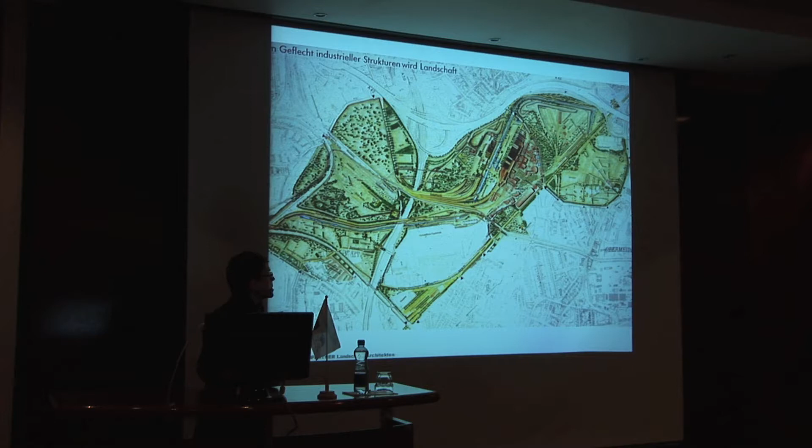I can only invite you to go there. Unfortunately it's a lot of money, and since all the cities are bankrupt in the Ruhr area today, they have hardly any money to do it, but two evenings a week the light system is still running. So what still looks here like an industrial compound effect has become a park. With all these systems, it transforms history into future, it makes industry part of our life, even if this industry is abandoned and not working anymore. There are many more things to talk about, but I thought this gives you a glimpse of how we can integrate these elements and make urban life more interesting.

How to deal with waste? Of course we cannot really live with waste, that's a sanitarian problem. But what we know is that these waste compounds, and this is one of the biggest ones in, well, I would say almost Europe, is being eaten up by the city.

The city is growing around it, and they were asking what to do with it, inviting artists at the very beginning, the real landfill, and besides that also our office to give advice on what to do with it. Then they started an international competition, which we fortunately won, a big honor for a German working in Israel, I would say.

We also won a second competition just afterwards to deal with the enormous landscape around the waste compound, because they have to make a floodplain in order to retain stormwater. Regularly, Tel Aviv is flooded in some areas once or twice a year, because they have hard rainfalls and more and more sealed surface, and also because we're very close to the West Bank and they don't have any means to stop the water from running down and taking all the waste onto the streets with it.

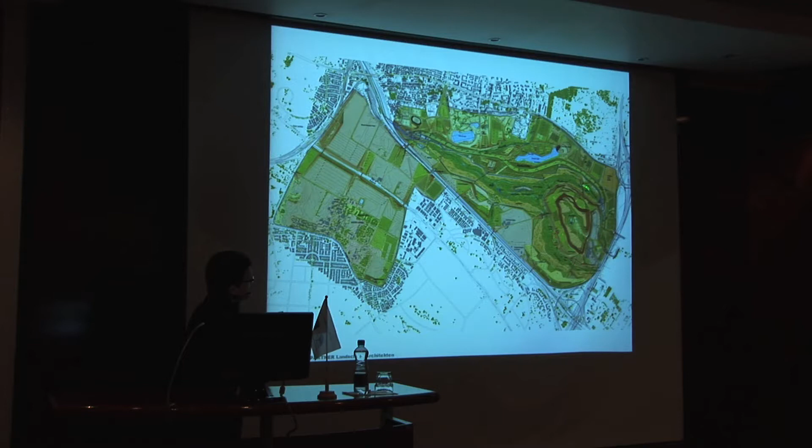Basically, this area is flooded and the city is flooded. So we're going to move here 7 million cubic meters of earth and create a big park around it. But I just wanted to talk about this one, the waste compound, what to do with that. This is a photo from an airplane, because Ben Gurion Airport is just beside. What we did basically is to reposition that thing, and in contrast to the other competitors, we said we save the form and do something with it.

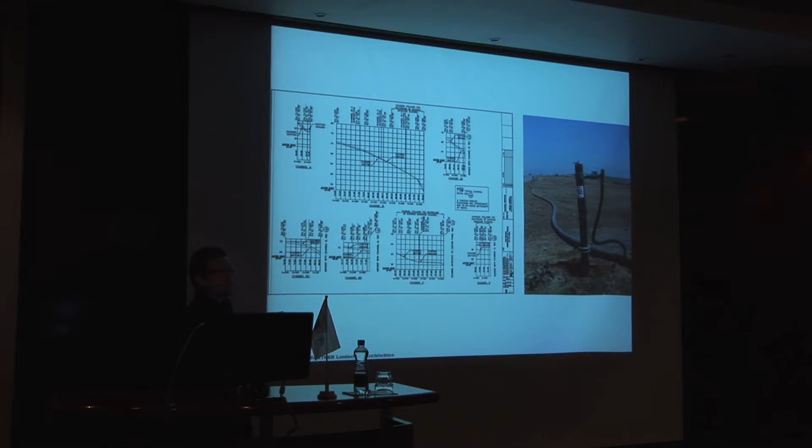And the second is, a waste compound is like a pudding. It tends to go down like this, because it's more or less liquid. So our proposal, and I think that's why we won, was to just put a berm at the bottom in order to keep it from doing that, and to make this kind of security system the future landscape.

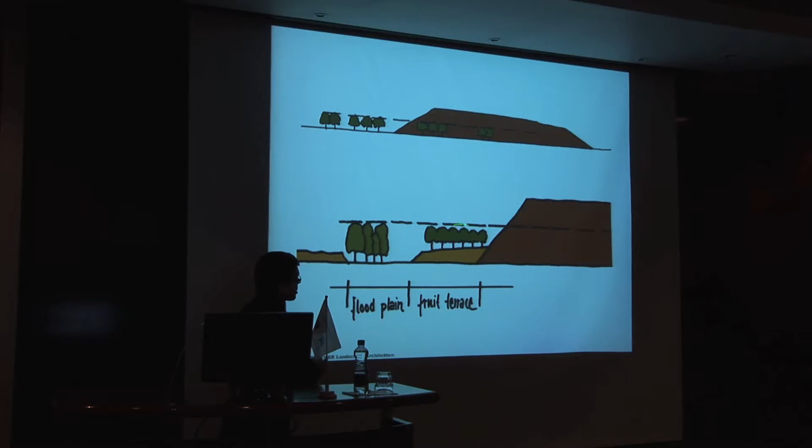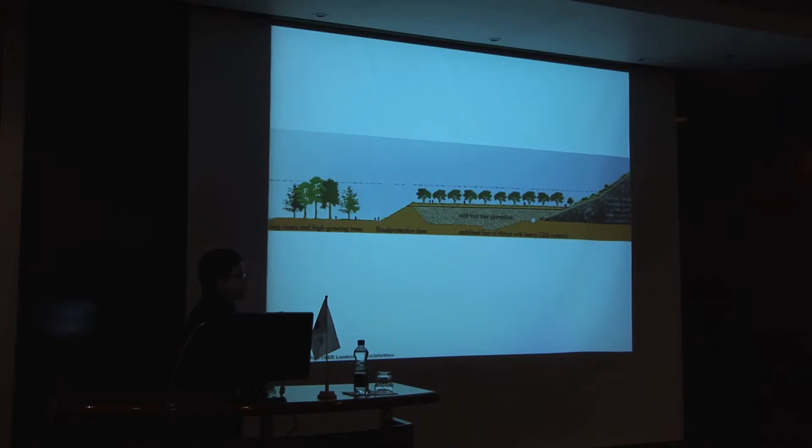It was, of course, in the competition, a simple drawing. It has become a bit more complex, a bit higher, a bit stronger, because the landfill turned out to be very big. And creating this berm around it, which was then occupied by agricultural patterns - that's another theme, to integrate agriculture, here mostly with fruit trees and olive trees around that.

And to basically push the river, which was at the bottom of the hill, outside and make it a kind of free-flowing riverbed, naturally driven. You would walk over industrial bridges inspired by the industrial past, over a kind of green landscape where there's a lot of water, and you walk into a rather dry landscape, which is agricultural.

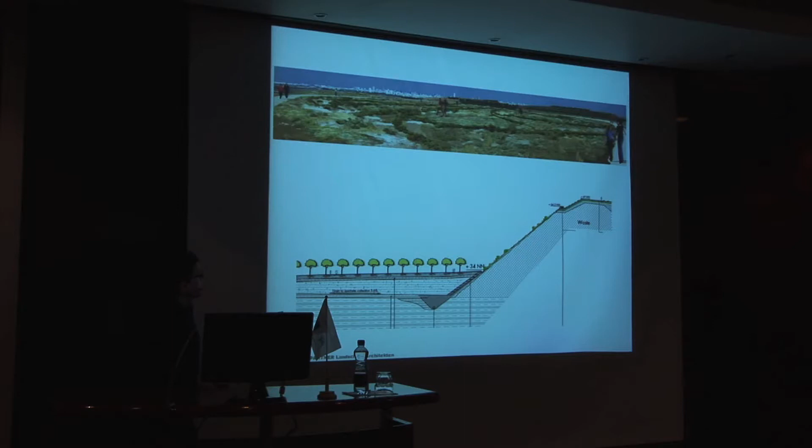And then, this is the latest plan we've been doing. Of course, it has been continued with colleagues in Israel - we're always working with locals when we realize projects far away. And we kept the outside of the hill as it is, in order to keep that fantastic picture, and light it at night, do something with it. And on top, we kept the big plateau in order to see the white city of Tel Aviv and the Mediterranean Sea, of course.

The sealing is necessary, but it helps to collect all the rainwater and keep it in little ditches within the sealing in order to have more water for summer. Unfortunately, this is not enough to have enough water for the park, but it helps a lot to make it more sustainable and well working.

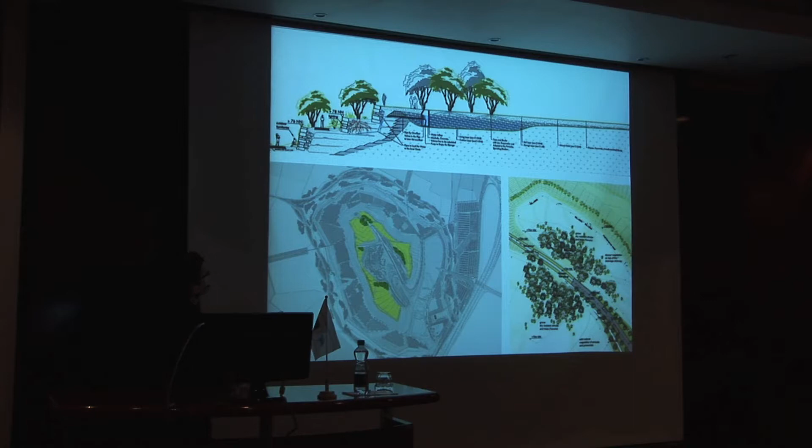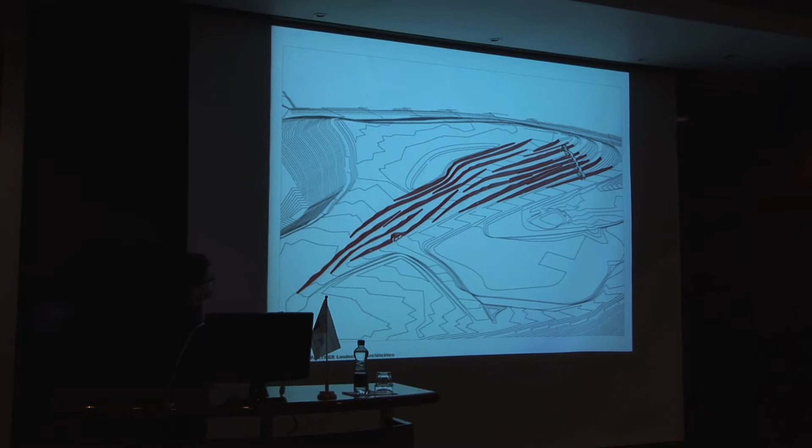The second system was an inside valley, which we kept, and we're working with movable systems. So there's no clear line, no straight line, no cool concrete wall. It's an old system which works perfectly in such a setting - the old drywall system, which you might know from Mediterranean countries a lot, which has to be piled up by hand and creates many little usable terraces.

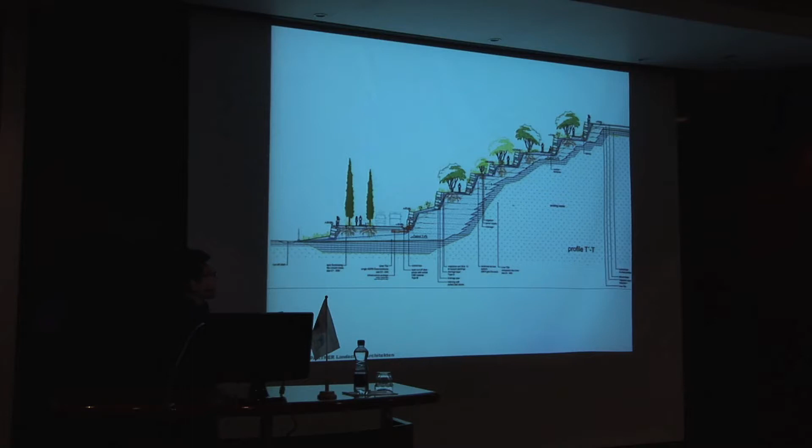So the technical system is usable - that's very important. And it creates a landscape which has thousands of paths and can move and works with recycling materials only. This is in our garden.

We are testing some of our systems in our garden. This is not always funny, it's a lot of work, and now it's a lot of maintenance, because the garden is occupied by experiment. That's where we are.

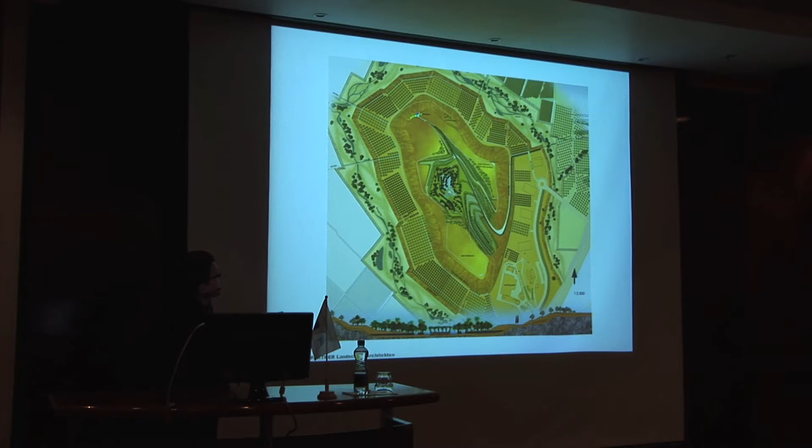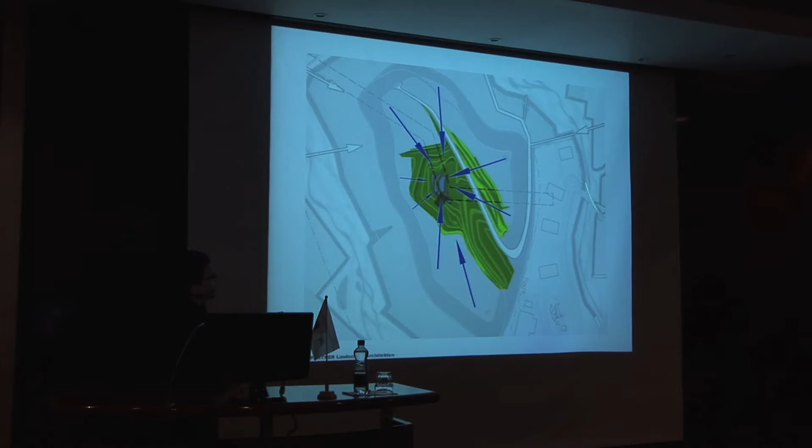So within this central area, we're doing the landscape where we put all the water we save. It's kind of a typical system in that region, adapted to the climate. So all the water from the top will be put in there, and hardly any water will come from outside into that kind of oasis.

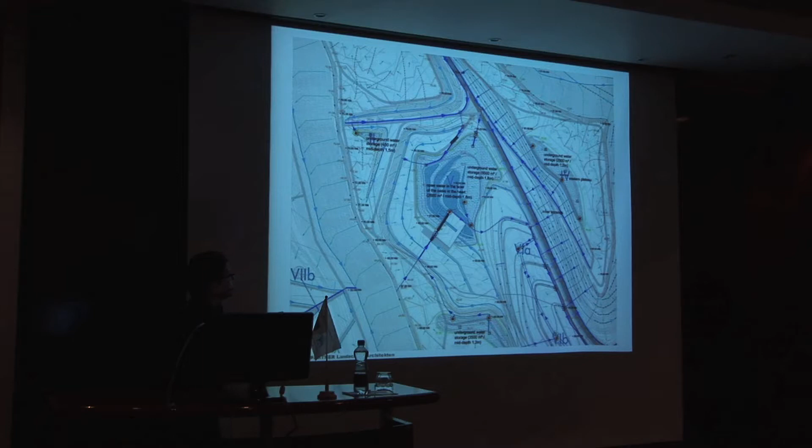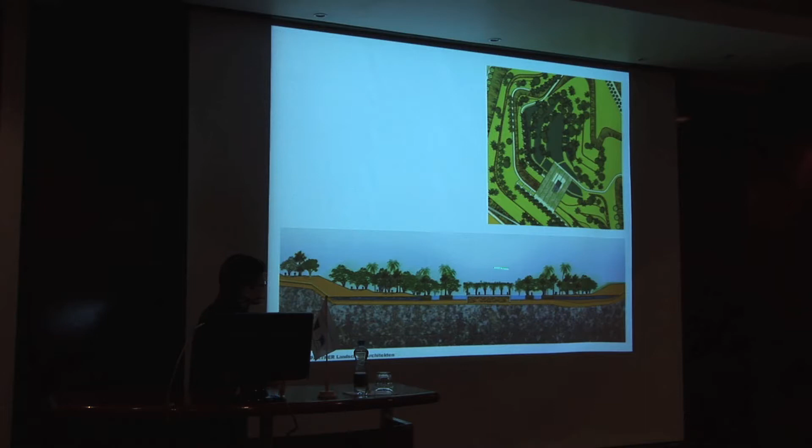The system is of course complex because we have to work with moving earth so that these drainage systems will also work in the future. And then finally, we have an underground storage system, like an oasis also. We're copying nature, so we have a Gabion system on that kind of level, where we bring all the rainwater, keep it cool, so we don't have to recycle it. And we only need some pumps to move the water within the central system and use it for watering.

Maybe one day, this is a very old picture, it might look like this. We don't know yet - I mean, this project is constantly adapted to political circumstances, let's take it that way.

Israel has the problem that when they have a crisis, whether unfortunately military or financial or whatever, it has a direct effect in that small country on every project. And so the project is difficult, and we're starting rather with the big things, with things which can be shown in the press.

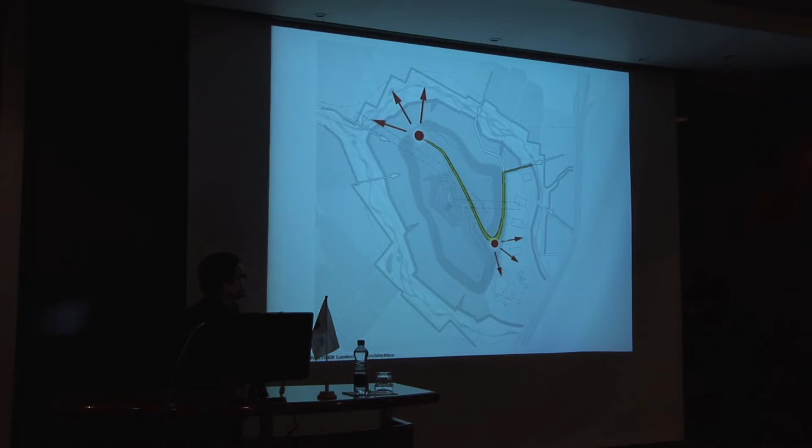And these two things - it's the path up, sponsored by especially American experts - consist of a viewing platform, which will be put on a kind of access road in here, where you can look at the recycling systems. And this is the night image.

So this will be the pathway. This is an animation, and you look down into a recycling park. We said, no, we're not taking the recycling park out of sight, we want people to see it. It's one of the most visited recycling parks, also shown as animation. This wall has just been constructed, people can already look down, but the path is not yet built.

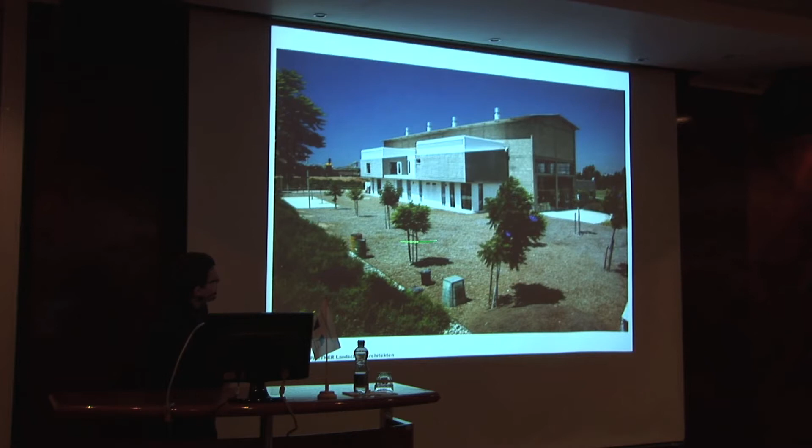And they look down onto systems like this. This is a recycling center in an old compound, where all the furniture and everything happening in there has been done with recycled materials, recycled wood, plastic, etc. Especially in Israel, recycling is extremely important because they don't have any resources other than their wonderful climate and wonderful earth to create agricultural products.

Recycling has become a big issue in that country, so school classes are coming here, companies are sending their staff to be trained and informed about recycling. The other point, sponsored by those people, was a lookout point. Every time you do a park, think of that, you need a good lookout point, because politicians want to have the inauguration of the first step in something like this.

But also, I love it. What is a park without these fantastic things? Think of the old parks like the Buttes-Chaumont in Paris, one of my favorites, where you have that little strange structure on top where you go in — you don't need it. You could go on top of a mountain and look down and say, oh, beautiful it is, but people love to have something there. I love it too.

So what we did is this, it has to be a moving structure. You cannot do something stable up there with a view over Tel Aviv. That was the animation — it's a bit bigger than that today.

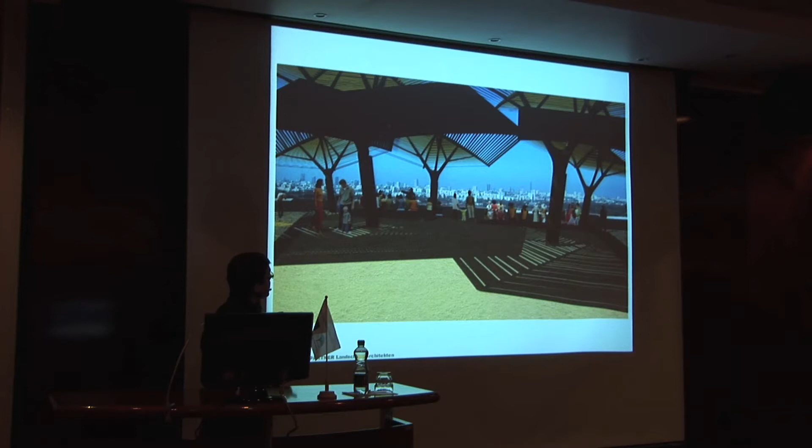From there you can see that construction has started. It's very slow. I think this project will last very long, much longer than Duisburg, much more than 10 years. This is just during construction. I'll show you that picture because it was the only one I found.

When we had the inauguration, there were so many people and we were not allowed to go here because the local engineers made a mistake in the calculations, and one of these was just falling down. They change everything in Israel — it's quite funny, to make it more efficient or cheaper. We had big problems, now they're reconstructing the whole foundation. It's not very funny. But it's a moving structure which moves with the mountain, and in this sense basically reflects the mountain's logic.

A third thing is traffic. As designers, architects, we're very much working on making efficient systems where we save space, use less square meters, make things efficient, bring things together. But the most terrifying system in our modern world is streets.

We're covering each month already 60 hectares only in Bavaria — I think it's even more than that. And you have here the effects of that, which is part of our modern life. We don't like it, we try to push that out, but it is part of our modern life, and of course these systems, which are very efficient, are not adaptable to urban areas.

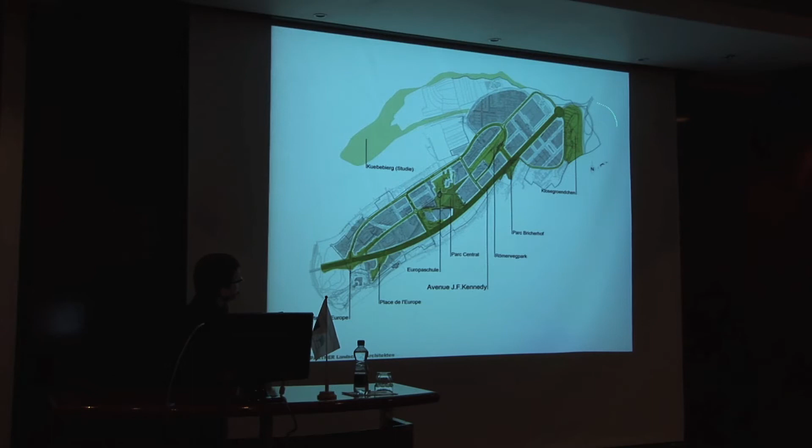That came along with a big master plan, where we had some park space, but I only want to talk about this. That's how it was looking: the motorway, very effective, only 2 junctions, which means an enormous production of traffic, because you have to make big detours to get to your house, from the back of course, not from the front.

And you're losing all that space. This is anti-urban waste. You need maintenance for it and you cannot use it. There are some ecological programs for that, but I think that's rather ridiculous in modern times. We have to do something with it.

And that was the result, 10 years later: the boulevard, which of course is huge, but it integrates not only the 2 lanes, it integrates spaces for a new tramway, a bus system, pedestrian areas, a contre-allée, which is the parking along that way, so you can park along that. Here you see that section. It's a huge boulevard, but it's also a huge area.

One of the first realizations, it's realized in steps, integrating also these very anti-urban structures, although nice architecture maybe, but very problematic to integrate. This is the final piece we're just working on, the connection to the bridge and to Luxembourg city center on the other side. These are all European institutions, and it will be more and more dense, so there will be constructions all along this side and this side.

And now I talk about how this looks. Well, there was a motorway once, you can now cross. Very simple. It's interesting because if you ask engineers who are calculating that, they say it's not possible. But the thing is, when you start calculating things, the only thing you get is more traffic. It's in the logic of the system.

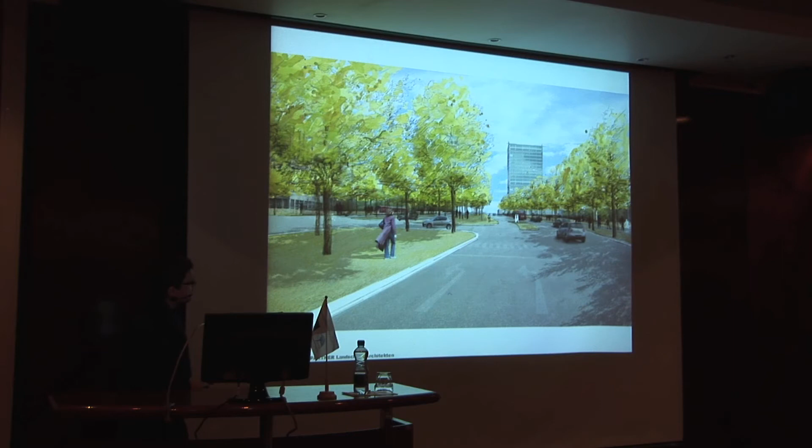And I just want to talk briefly about this system, which is the way how to integrate such a big infrastructure into green systems. When you look into something, usually they don't have any money for that, but already in classic landscape architecture we can learn so many things. Like when you see a landscape and Sckell or Lenné was putting a little temple, the whole landscape became a park. You know these famous guys, Capability Brown and many other designers, and what we did is something more or less similar, create a window.

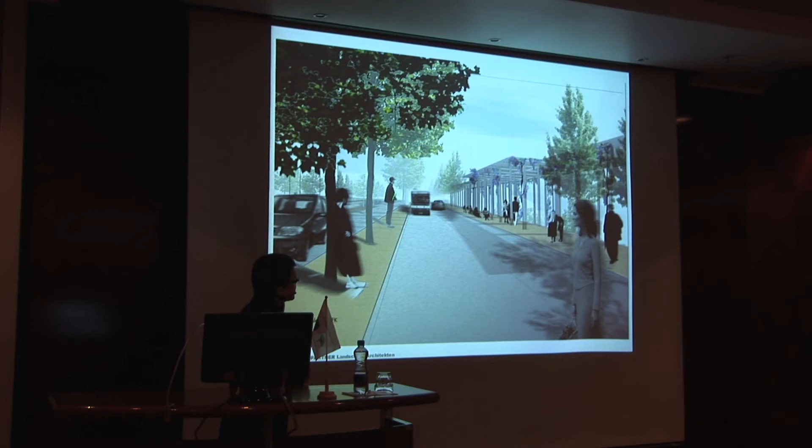Fortunately, they bought into it, and this is the motorway plan. We proposed two structures: one which looks into the landscape—a kind of slope down into that landscape, which is more or less artificial, but green—and one from the park system, which looks into the city.

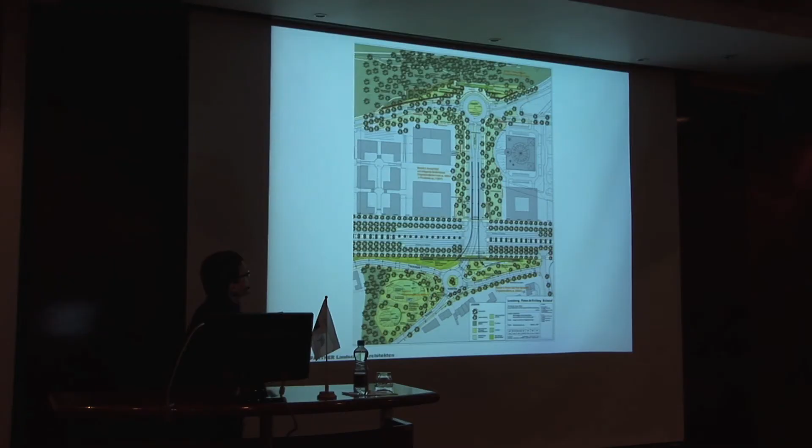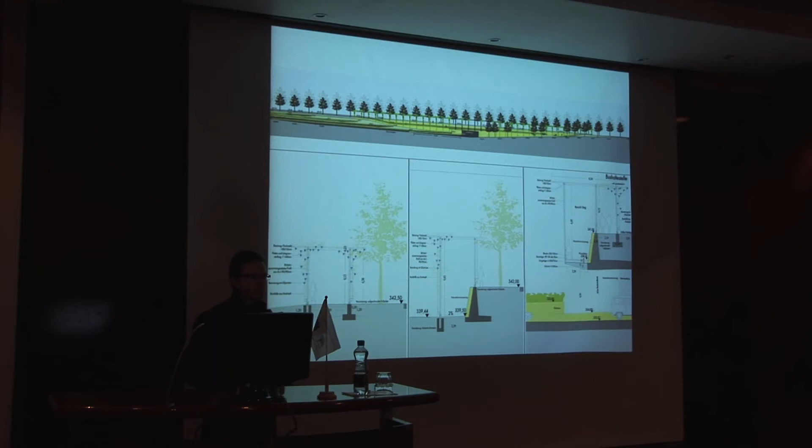The effect was that we proposed long structures with big walls, a big intervention which can cope with the power of traffic. Traffic is a very powerful system. If you discuss it that way, you can maybe cope with it. If you say it's noise, it's horrible, it's dust, it's emissions, you will never be able to work with it—you'll have to leave it to engineers and specialists. But if you take it from a landscape architectural point of view, you can have interventions like this.

This is construction, not an intervention. Behind it is a green system, and we're connecting the street directly to the green system. It's a very classic system—you connect directly and make it interesting to walk into that landscape. So when you drive here, you're not having a decorative green buffer zone, you're having the park right next to the street. That's an open system.

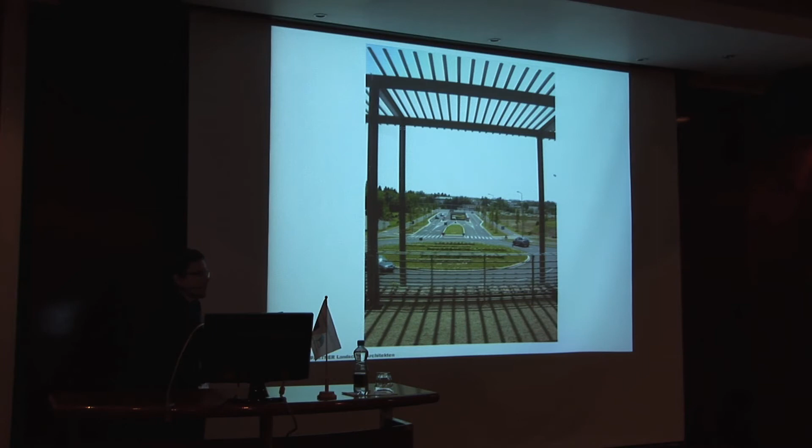All the other systems, I think, are not. You connect it to the beauty of landscape, which happens sometimes right beside streets, and you have the view back into that system. I wouldn't say this is beautiful, but it works. We have to find ways to integrate big streets into our cities. We have no other chance. If not, we neglect a very important part of what could be work for landscape architects in the future.

So this is the boulevard. You cross here, you walk down, and you also see the green systems, which you wouldn't see if you drive along. But because you have such a symbolic nature, you might see it, and then you walk down. This is just a year after construction—there's already many things happening, many more architecture to be created. I hope it will be a little bit different to this one here.

And also connecting underground systems—this is something we're doing also in recent times, trying to find static systems for crossing. That's nothing new. But what is important is that not the traffic system is dominating the area—it's the cultural system and our perception which is dominating the car system.

So the last topic I want to talk about is energy. I've been talking to you about the problem of the change of energy system in Germany, and the biggest problem is that we have these peaks of production of energy, which is more and more happening due to natural processes, to wind and to sun. And we have the problem of peaks of use. In order to buffer that system in a kind of 2 to 3 day distance, we need different storage systems.

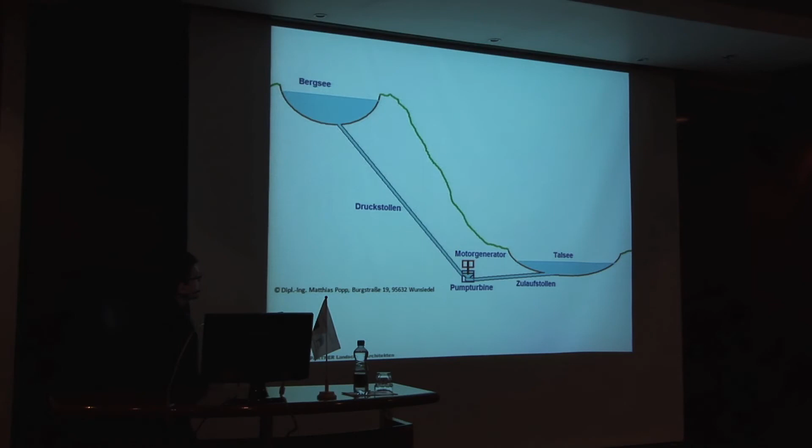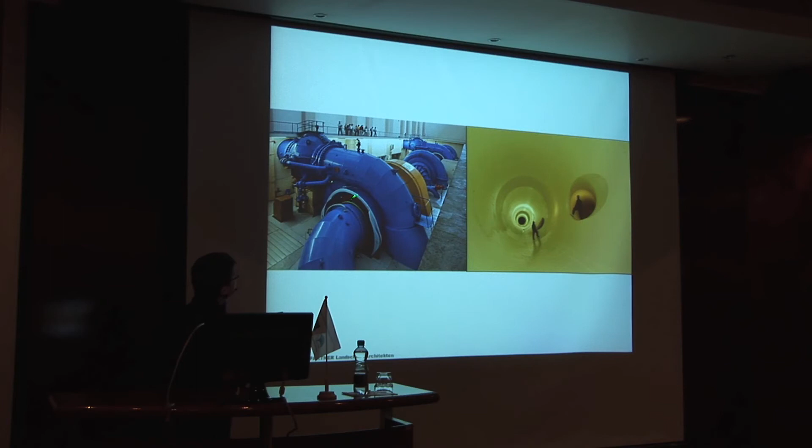But I'm talking about a system in Germany, and you have these wonderful canals where thousands of cubic meters of water run through in just a few seconds. They're beautiful, but unfortunately we will not see that anymore. What we can see is these turbines, where you always need two because one could break, etc. But what are the effects?

These systems are big, really big. And of course, most of the people who live around an area where you want to construct something like that are against it. Because everybody wants a change of energy system, everybody wants that we're not having any atomic, industrial or coal industrial energy production anymore, but nobody wants it in its backyard. The NIMBYism, you know that perfectly. But it has to happen somewhere. Unfortunately now, they are doing it in Germany, and that's what will happen.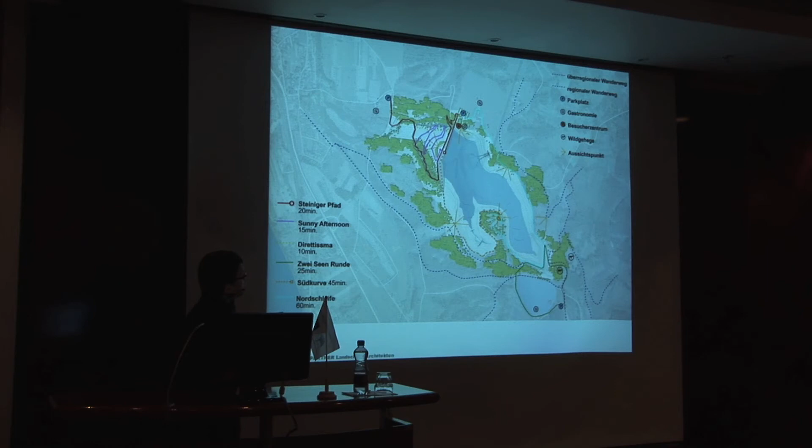Now what to do with that? Damn it. You can walk around it and make it beautiful, but what can we do? So they were asking different landscape architects to make a proposal, and we won that competition because we were not dealing with nature by just covering it with plants, but doing the same things as others: the path system, connecting existing lakes and artificial lakes, and making use of a kind of corridor where you can look at it. But is that all?

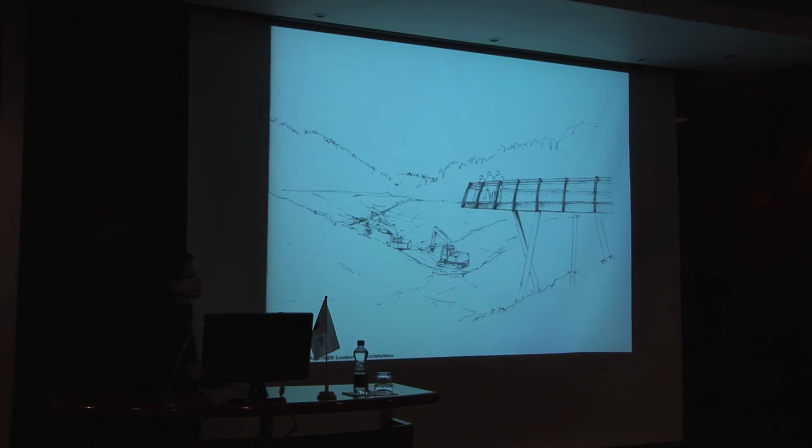We proposed a first, very simple system with some lookout points. It's so far so classic, nothing special, but if you have nice lookout points, more people come than if you just have a place with a bench to sit. So we'll put some of these around the future lake.

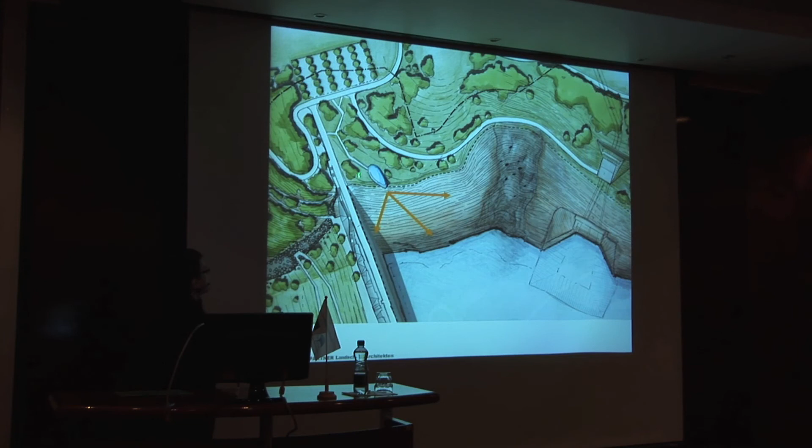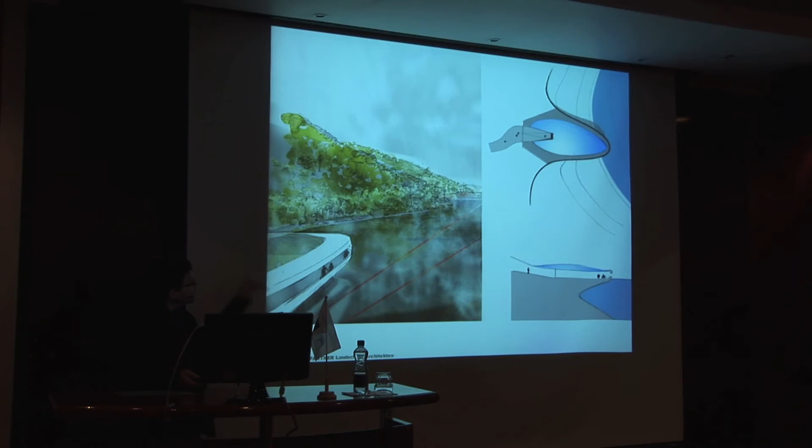The second is simulation. Simulation is to show what you cannot see, what you won't see: water at its highest level. So we proposed a visitor center which is not a little cabin somewhere where you sit and look into the landscape, but something right at the edge. It's not yet fully discussed because the engineers, for security and surveillance reasons, want it somewhere else, but I think we'll convince them. We put it basically at the level where people stand, which is the water level you will never see, with something inside. This could be constructed at the very beginning, and from there you also look into the construction site. So far, so classic maybe.

Then what to do with the rubble? There will be millions of cubic meters of stone, and most of it will be used to construct the dam, which is a huge, massive system—not reinforced concrete, just concrete rammed, like in Roman times. And what to do with the remaining rubble? We proposed creating something for tourists in the folds between the dam and the existing landscape, which could look like these tourist attractions somewhere in Germany. We hope that with the extracted rubble, we can do something similar for people to go through.

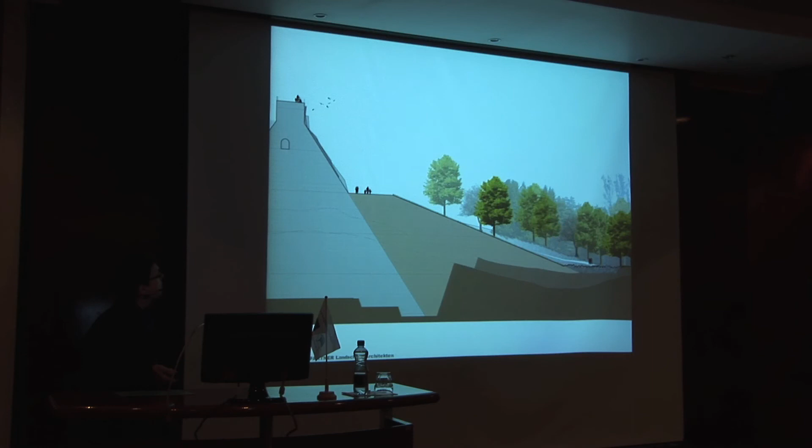That might be more interesting than walking through the forest. This would be in the fold, creating a specific way to climb these 40 meters to the top of the construction. The second element is the front piece of the dam, which will mostly be covered with green space. We want to make it beautiful, using a maintenance system to keep it that way. Well, these systems are known.

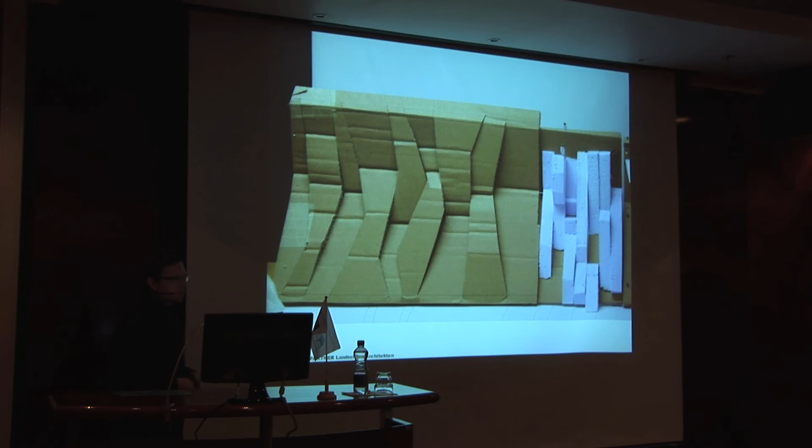So we propose to do something with it. You need to use these structures, climb on it, do something, make it maybe more interesting. We were thinking of 19th century architecture with all these back-and-forth drops, which weather very nicely because of the dirt settling on them. So we were transforming the surface of that structure, creating darker points and lighter points. Then maybe this can become something like a mountain again, where you can climb—you can create folds, you can create this. See the person here? This is 20 meters of concrete.

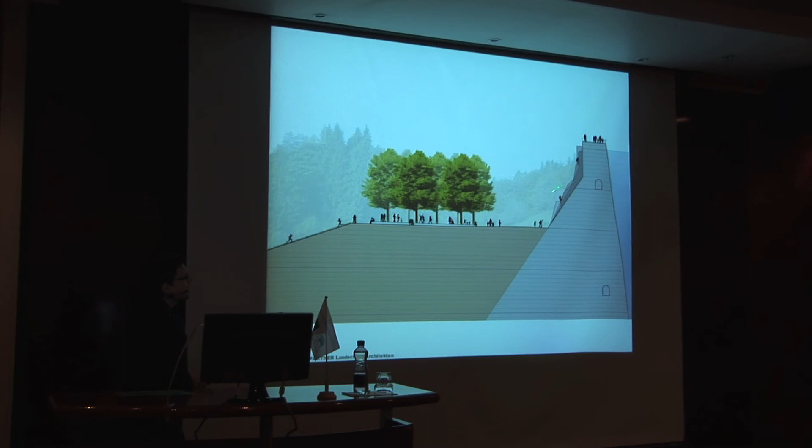The biggest climbing area in Europe would be possible. This, unfortunately, is the old construction—they have changed it again, it's a bit flatter, so we have to make that more dramatic. But we can use that. We propose a little square in front of that 20-meter structure so that you can climb here. But this is also interesting to walk here because it's more beautiful. So it could look like this, maybe.

Maybe. You never know how money flows, also in Germany. So part of that, I guess, will happen and will become a venue, an attraction.

We got a lot of credit for that from the communities. It's still undercover because resistance against the whole system from the local ecologists is very high. They prefer atomic energy instead of doing something logical. But it is difficult, I must say, so I have to be very calm with that, not to share too much.

The last system is the water. The water is warm, because it goes through the mountains it's not going up and down with the temperature—it's sometimes up to 30 degrees. This is warmer than a swimming pool. So especially in winter, it will create fog. I think that's dramatic and certainly interesting.

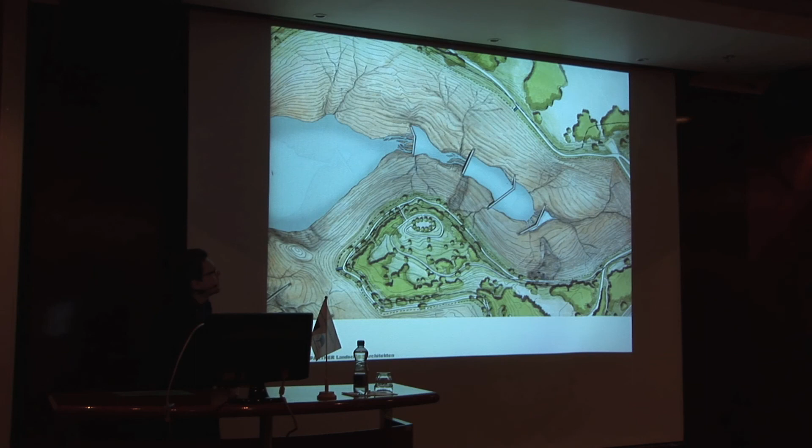And I hope I could see that one day, and these walls would be made in the same way as the big walls, the big dam, concrete structure. So they duplicate something and put it at a human scale.

Another possibility we were adding then was something you could see more—we called it the nixie tubs. So just putting some holes into the rocks which are around this one, at this basin. And maybe we can think about some water in there. We think, well, who is there? Whose bathtub is that? I mean, what's happening?

Who's living there? They will be flooded sometimes, they will go up sometimes, but that might make that whole landscape more interesting to walk around, to look at, to see something like a spectacle. It's an inverted water system in a certain way.

So hopefully, in 7 years, I can show you the realization of some of these elements. And until then, I hope that I have the chance to come to Tallinn again. But that's about transforming such landscapes and making it maybe something we can accept in our urban environment. Thank you very much.